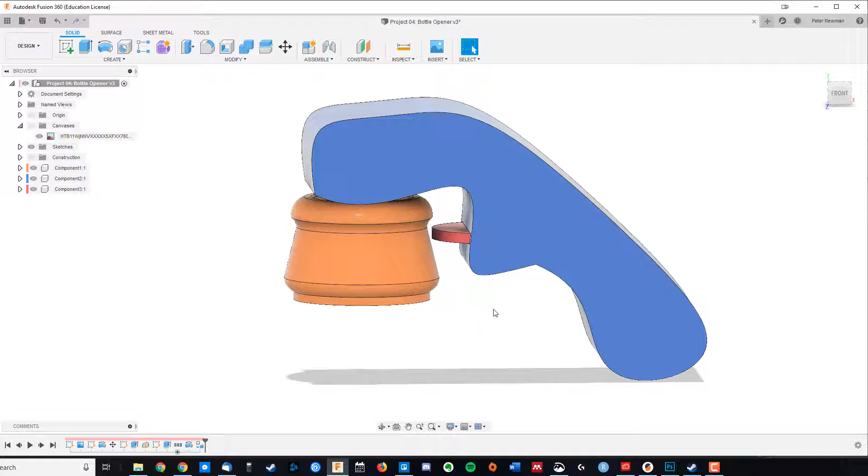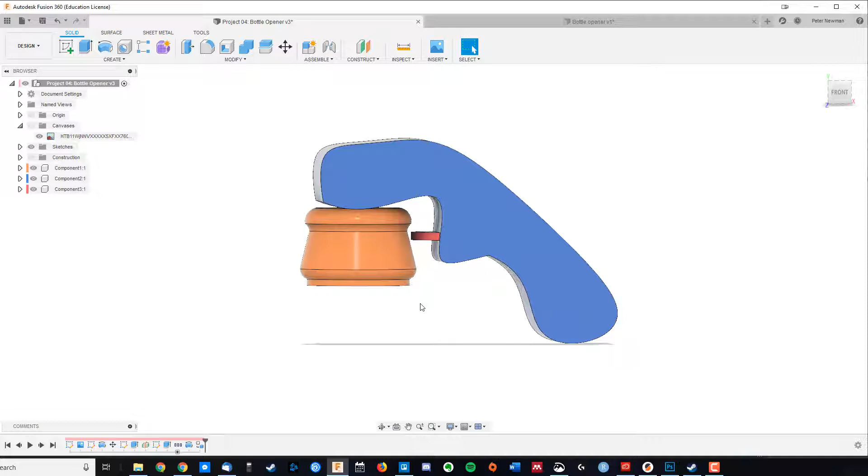We're going to start a new design, save it as bottle opener, and go for a sketch, this time on this rear plane here. This time the design is going to be a little bit looser, so basically all I need is a bit of a handle and something to leverage, and of course the slot for the 10-cent coin. What's really nice is to be able to do that organically inside of Fusion 360, it's really easy. But what's really helpful is to have something realistic, so what I've done here is just modeled the top of a bottle. That way we can see if our dimensions are going to be anywhere near realistic.

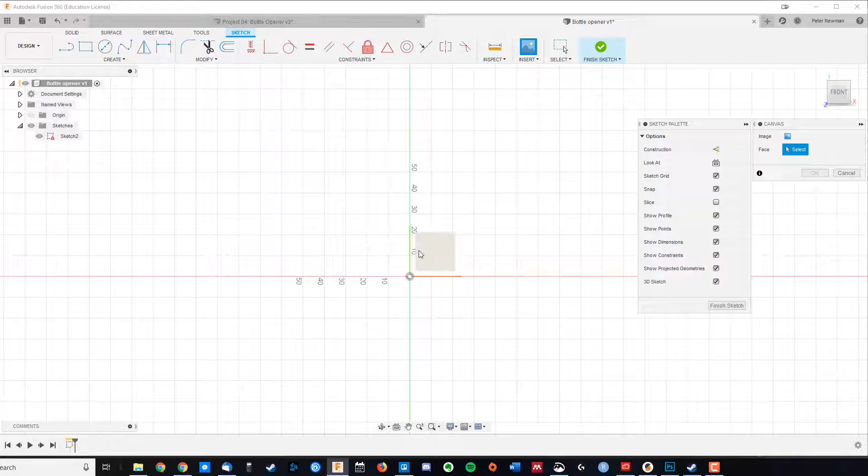To do that, we're going to come back here and use a canvas. We'll come up here to insert canvas and choose our image. The image is in the description of this video, but for me it's in here - there it is. I'm going to choose which plane that projects onto. So what we have here is the patent for the bottle, with all these dimensions drawn onto it, but of course at the moment it doesn't match those dimensions at all. That's okay, we can come up here to canvases, and this is really handy.

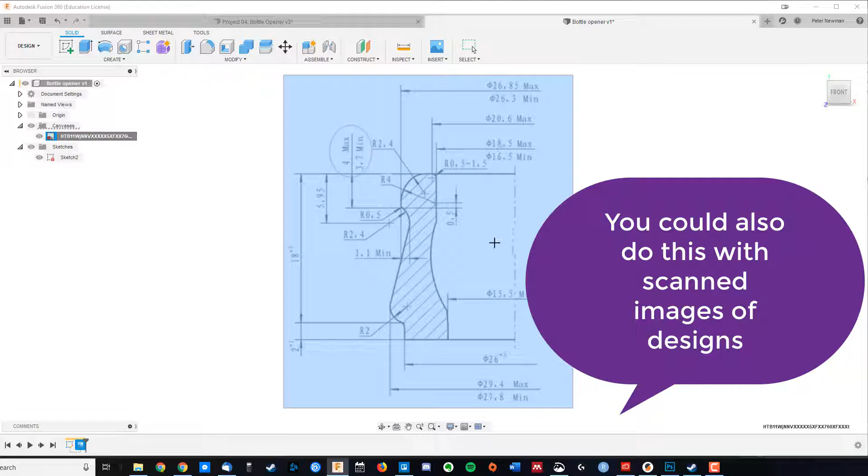We're going to right-click on it and click Calibrate. What this allows us to do is select two points, so I might go here to here, and we can tell Fusion 360 how big that distance should be. Now, of course, this is 26 mil across, so I'm going to go 13 mil, and now it's resized that canvas to be actually how big we want it.

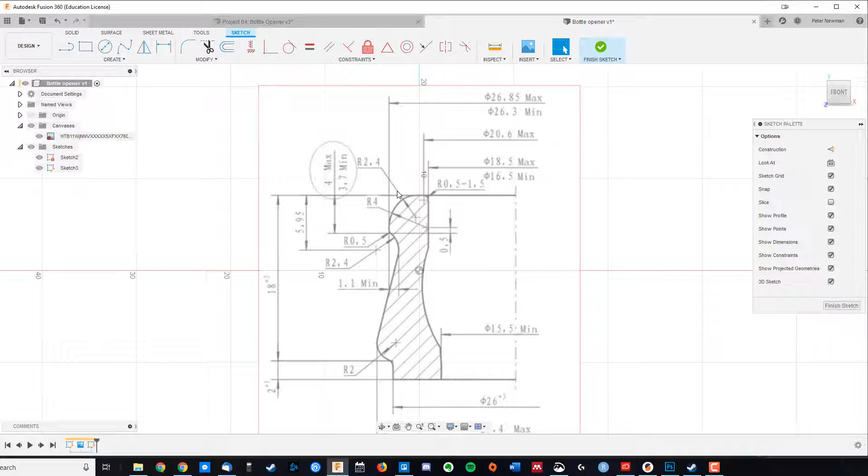So we're going to go finish sketch, and create a sketch onto that plane, and what we're going to do is actually draw in this profile here. It doesn't have to be exact, remember it's just a reference. So to do this, we're going to use the line tool and just draw in our straight sections here. Remember, it doesn't need to be exact.

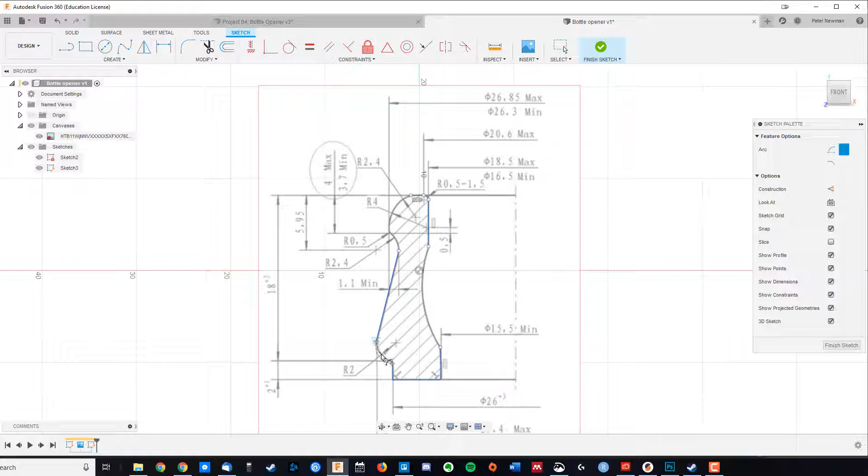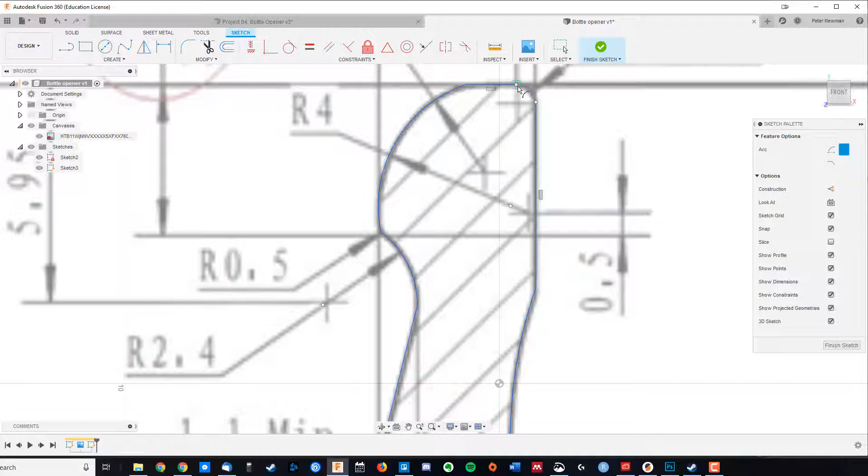And now we're just going to use 3-point arcs to finish our design. So from here to here, we zoom in and get some more options. Looks alright. From here to here, again, and we've got a double curve here, so I'll set my endpoint. And up to here, then the last point, we should end up with a closed shape. And there we are.

Now, the last thing we're going to do is draw in this middle line here, just like that, and we're going to finish sketch. Now, at the moment, we've just got this profile.

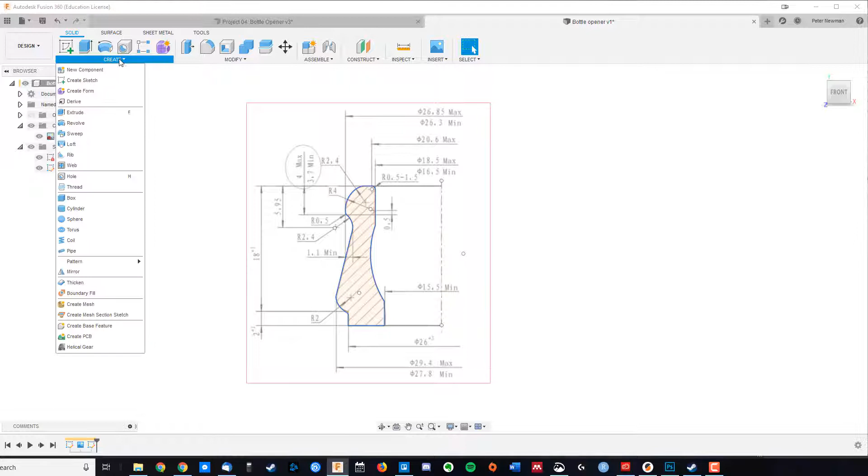What we're about to use is the revolve tool. So we're going to go create, revolve, and we see we've got a profile selected. And now we choose the axis, and lo and behold, we now have our very own bottle top to design around. That looks really good.

I'm going to hide my canvas. Our bottle top is kind of weirdly off axis, so I'm going to go M for move, select my body, and go point to point.

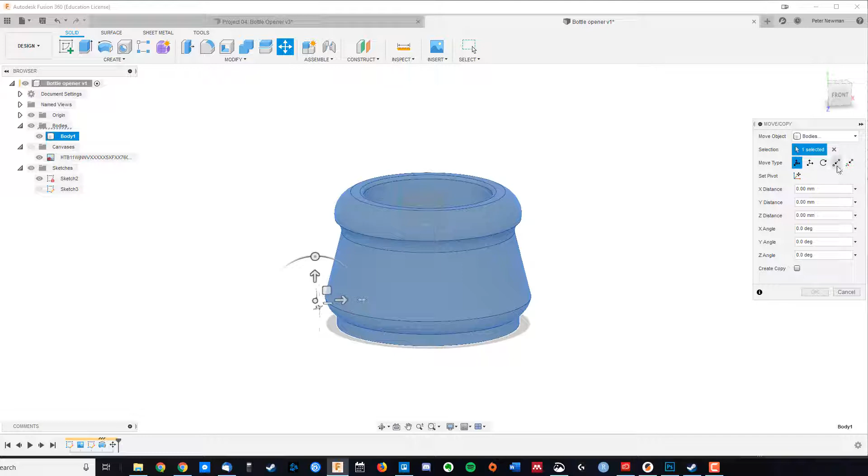Right, this is a really handy thing. Moving it around in 3 dimensions can be a bit confusing, but if I select my origin point as the top of that cylinder there, and my target point as the middle of my origin there, you can see it moves it, so now we're perfectly in the center. Now we're ready to start the rest of my design.

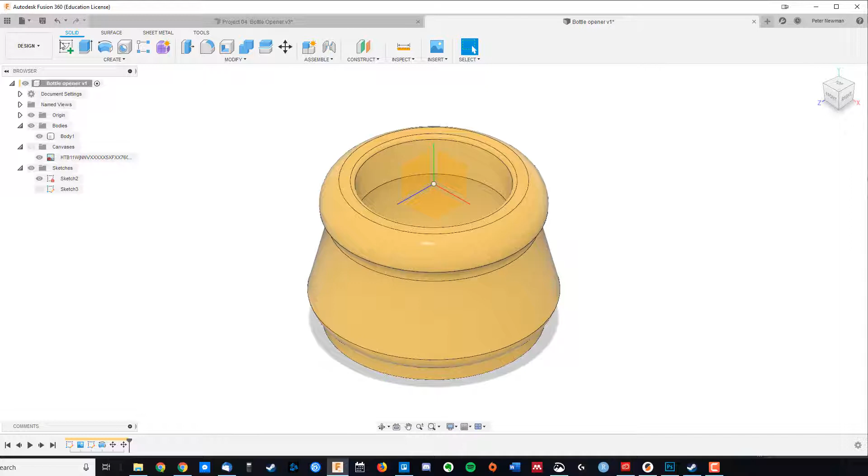What I want is something to leverage at the top, some sort of handle, and some sort of slot for the 10-cent coin to go into. So I'll come back to my bottle opener, and we're going to create a new sketch onto this back plane here. Now I can use this as a reference to vaguely map out what I want to do.

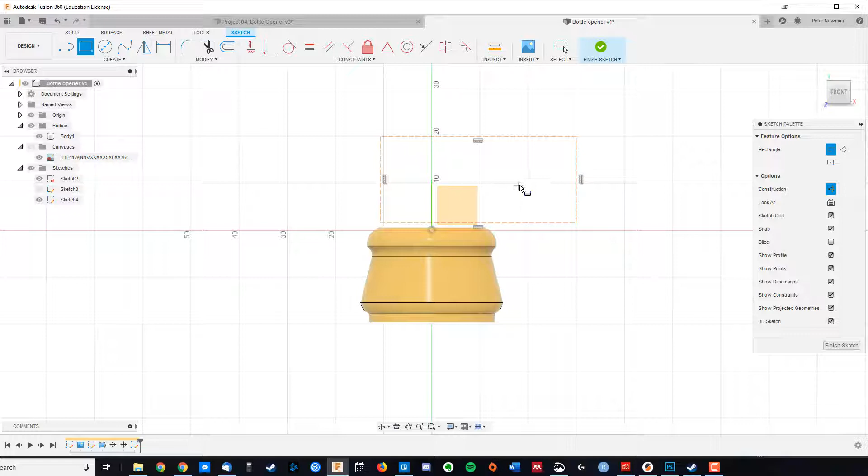So using construction lines, this is quite an organic way of doing things. I know I want something that's going to vaguely go up there, come over to here maybe, and then I need something for the 10-cent coin to go into, so maybe we just come down here. And then I think for the handle, I want it to kind of start maybe here and come down, maybe that far, get 90-degree turns everywhere.

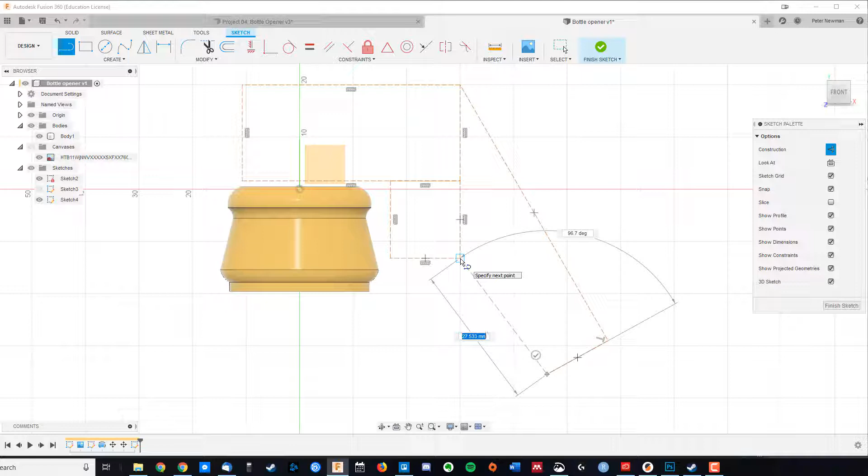And get a 90 degree there. Maybe it just comes up to there. Looks alright. So it's going to look vaguely like that. I also know I need some sort of coin to go in there.

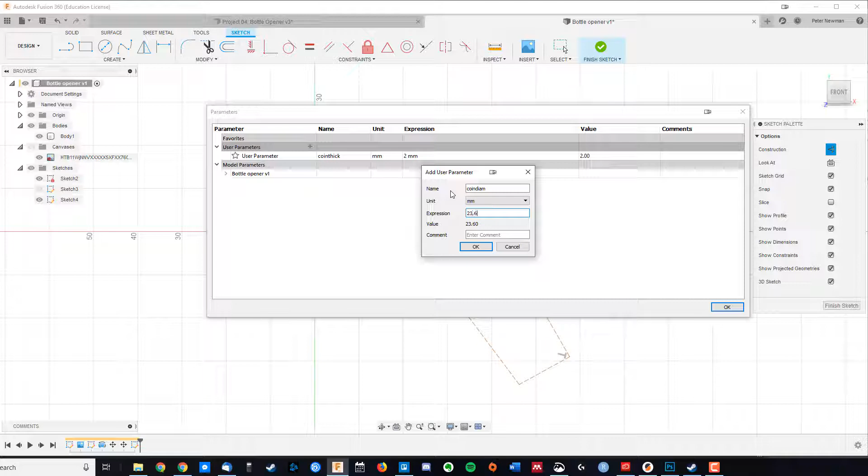So I'm going to come up here to modify, change parameters, and I know that a 10-cent coin is 2 mil thick, and I looked it up. Coin diameter is 23.6 mil in diameter. So I'm going to draw in a rectangle because this is where it needs to go. I want coin thick there and coin diameter there. Might move it around. Let's leave a little bit of tolerance.

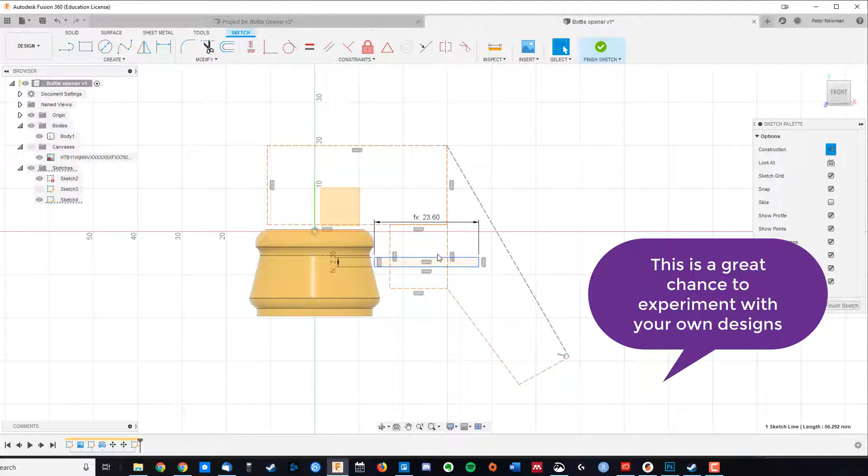This is a really nice quick way of mocking up a sketch. So now we're going to fill it out. We've got these lovely curves. The tool we use to make those curves is the spline tool.

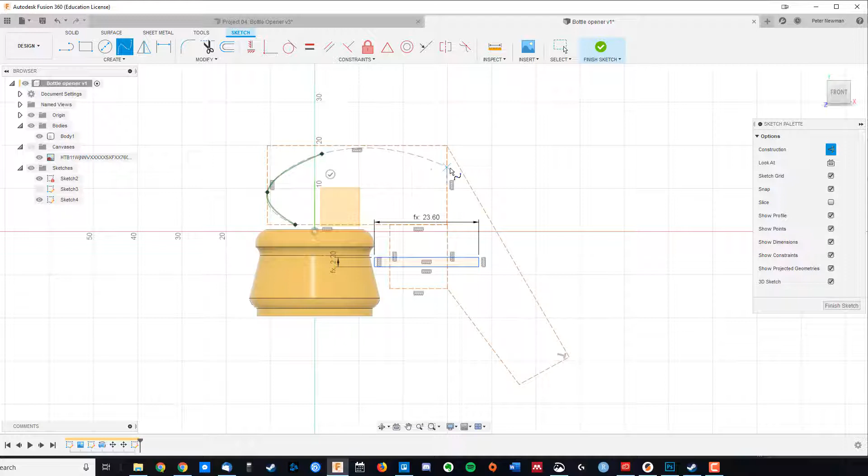So, create spline, fit point spline. And now I can basically just put in little handles here and there. Remembering it doesn't really matter how closely I fit to my dimensions here, but that initial curve was just to give me an idea of what it might look like.

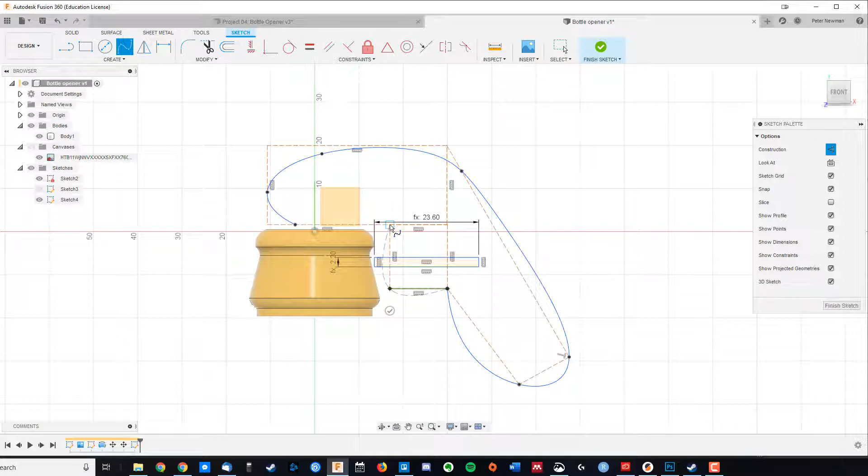Or you can see you've got these different handles that we can change the curve, and we can add more handles if you like. Hint, adding more handles makes it trickier. And why don't we make this not a construction and finish it off here, and up to here, and something like that, right?

And I might flatten these bits out because I know that's going to have to leverage off there. And look, I think that's looking okay. I'll just move these up here, give a bit more of a handle shape. And this doesn't have to be as far down. But you can decide what yours is going to look like all on your own.

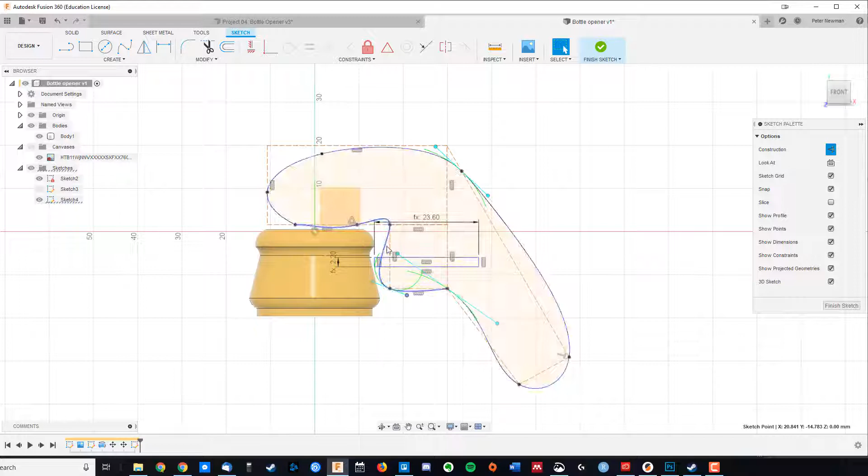And now we're going to extrude it out. In the past we've gone in one direction, this time we're going to go symmetric. And I want it to come out so that it's a little bit more than the width of the bottle top, knowing of course that the coin's got to be 23.6 mil.

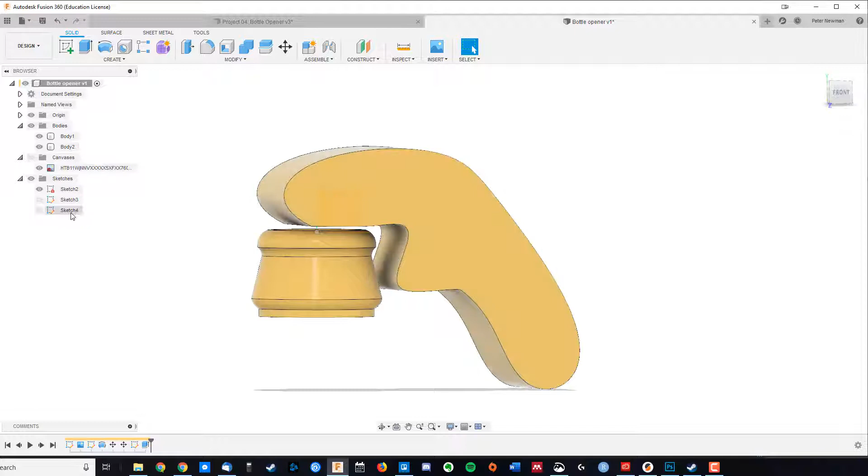The last step is to put back in that slot. So I'm going to come over here, turn my sketch back on, E for extrude, and we're going to come out to coin diameter on two, because of course we're going to go symmetric, and we'll add a bit of a tolerance there.

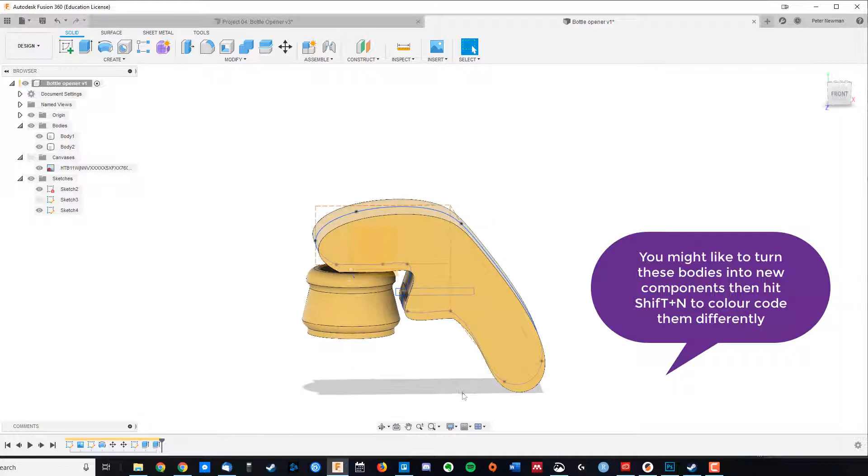And there we have it. Right, you've now got your own mixed material bottle opener, done with splines, and using a reference made from a canvas.